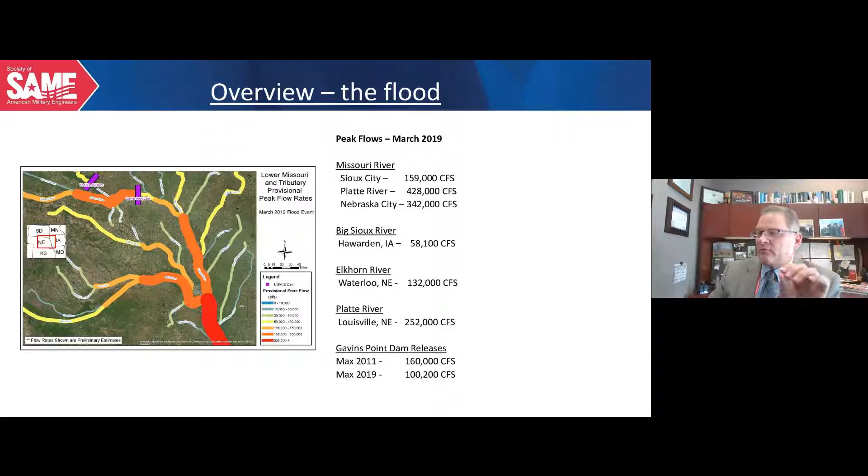The releases from the Gavins Point Dam up in South Dakota, which is the furthest south dam of the 6 main stem dams on the Missouri River, they peaked at 100,000 CFS. In 2011, they ran 160,000 CFS for months on end, but they're two very significantly different flooding events. The 2019 event was driven by unregulated flows in the tribs south of the reservoir system in Montana, North Dakota, and South Dakota. 2011 was largely an upper basin precipitation event where we maxed out the capacity of the reservoir system, a little over 63 million acre feet of runoff during that year, highest runoff year on record. 2019 was just behind that at 62.8. So basically the same amount of flow, but a significant amount of flow downstream.

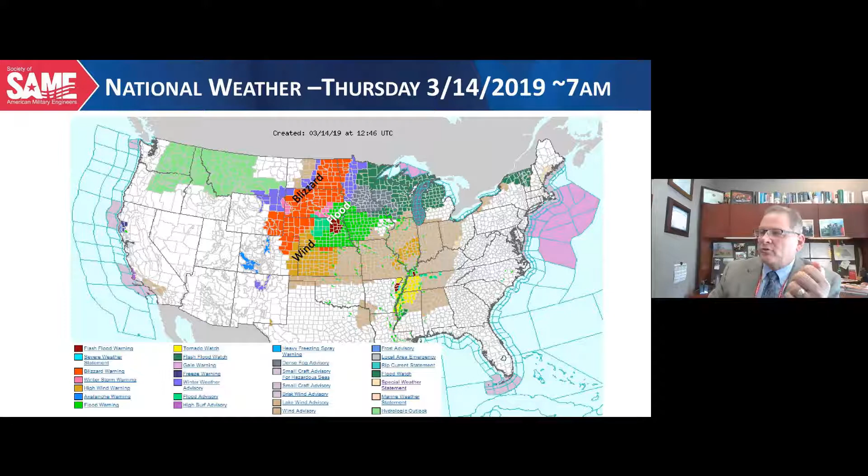This is going to kind of set up the precipitation event, and you never let a good event go by without coining a new word that you're able to apply to it. But this, we ended up with rain on top of frozen ground, on top of snow, the further north you got in our area of responsibility. And it ended up being what was affectionately termed a bombogenesis by those people within the weather forecasting purview. So you can see, I guess some would call this a beautiful picture. I call it kind of ominous and frankly a little bit scary.

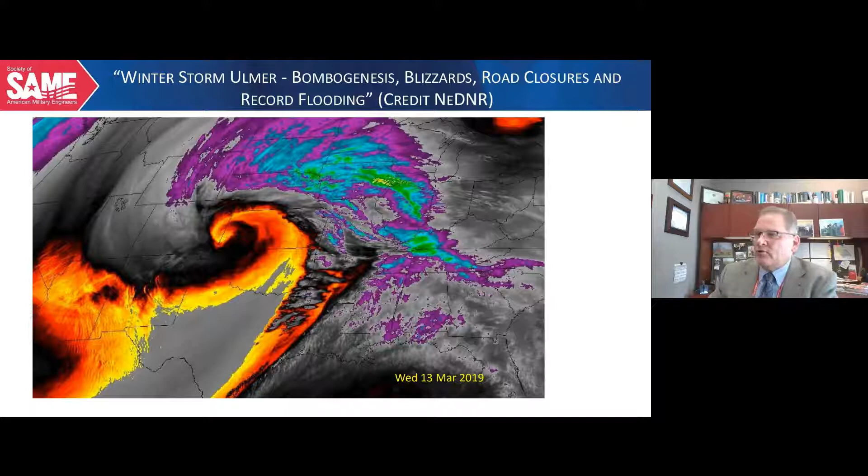But this weather track came up across the western part of Nebraska, saturating the frozen ground with upwards of 3 to 4 inches of rainfall. And then across the state of South Dakota, we ended up with significant bands of heavy, wet snow, all starting on the 13th of March. I can remember on the 12th of March, Tuesday, the forecasts were, well, we could see a moderate increase in stage on the river systems. And that dramatically changed over the course of about 30 hours, where we transitioned from it shouldn't be too bad to what became a very cataclysmic and catastrophic event that heavily impacted to the tune of nearly $1 billion worth of damage within a multi-state area.

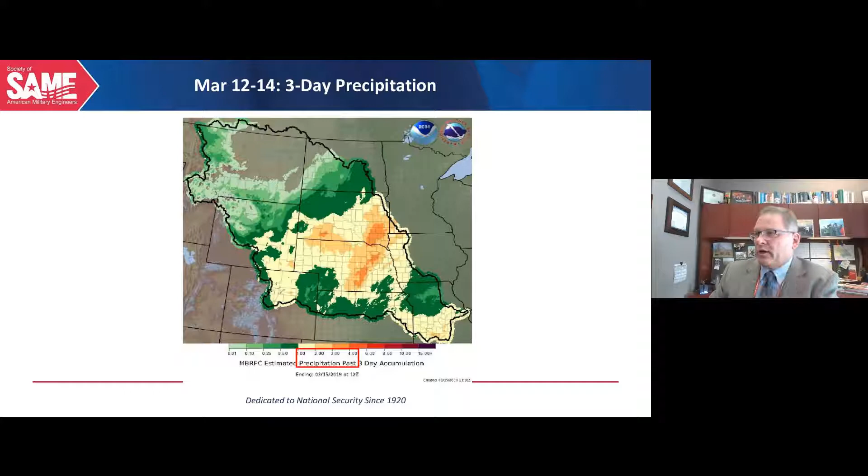So at Fort Randall, we minimized the amount of flow to zero, and then the rest of the flow was driven by the tributaries that came into the Missouri River system. So Ted? Yes, go ahead. You have the ability to shut off the Missouri River. Yes, we do. That's through those main stem dams. It's something that is very atypical. We've probably only done that during my career maybe twice.

It's not something that's obviously routinely considered, but this was the classic event where downstream flows, our inability to control the flow in the Platte, on the Little Sioux, Big Sioux, the Niobrara, forced drastic action, and we had the flexibility to be able to terminate that flow at Fort Randall. And basically over the course of the next 12 to 18 hours, you saw that tailrace from Fort Randall begin to decline as that flow cessation from Fort Randall began to take effect.

Unfortunately, Niobrara flows into Lewis and Clark, which is above Gavins Point, which again forced Gavins Point to have to continue to increase flows up to that 100,000 CFS flow rate. Today's flow rate coming out of Gavins Point is around 13,000 CFS. A normal spring flow. We have transitioned to drought conditions. The irony of that should be appealing to many.

But so we're in a situation now where we are reducing flows in order to protect downstream interests in water intakes and navigation responsibilities and those type of things. But we're currently running 13,000 CFS. So you transition from a system that's running 100,000 CFS to today's flow rate of 13,000. You can see why this was such a dramatic event during March of 2019. Understood. That's a factor of 8. Exactly.

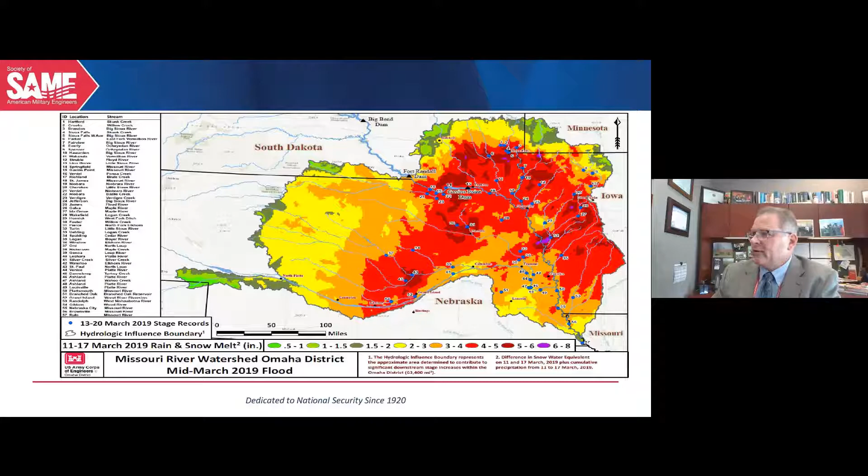And I really have to give accolades to local and state EM, to the Corps of Engineers. Certainly we were out there, boots on ground through the entirety, and many of the communities also rolled up their sleeves and they sandbagged and they provided a lot of those activities. When you see water coming, it's really an all hands on deck type of a situation.

So now, once again, we're going to walk through and you're going to see a whole bunch of water. And really the takeaway is holy smokes. But then I want to get to what the Corps of Engineers, what Omaha District looked to do to try to do things differently. Breck touched on it at the beginning of the conversation.

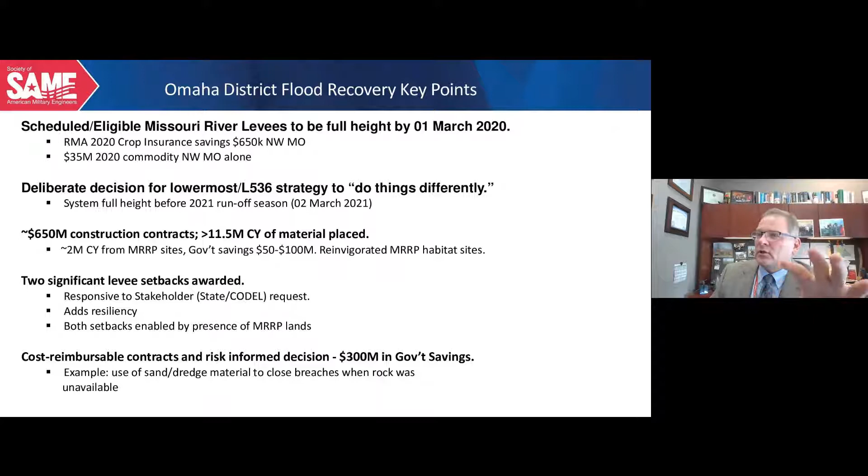Typically, within the federal government, you don't say use of cost reimbursable as a cost savings measure. Usually, it's been my experience over my career that when you get into an emergency and you're using a cost reimbursable vehicle, cost is secondary to addressing the significant risk at hand. In this case, however, we were successful in using that tool rather than the traditional firm fixed price contracting approach in order to save the federal government money.

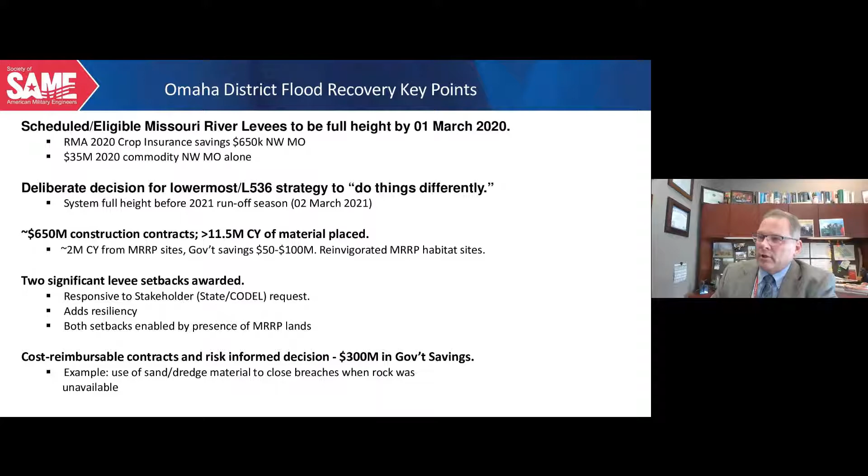And then a lot of times when you have breaches to be plugged, you preface the breach with rock before you place material over top of it, cohesive and non-cohesive materials. Rock was a big problem. As you can well imagine, while we got hammered with our levee system, a lot of other industry, Department of Transportation with roads, we had heavily impacted interstate systems, railroads. BNSF was heavily impacted and largely bought up a lot of the local rock, which was impactful for our ability to go in and plug those 50 breaches.

In 2011, it was high flows for long periods of time, and you ended up with seepage through the levee that ended up piping material, leading to the failure event. For 2019, it was largely predicated by flows over top of the levee, leading to erosive forces on the downhill toe side, which led to failure.

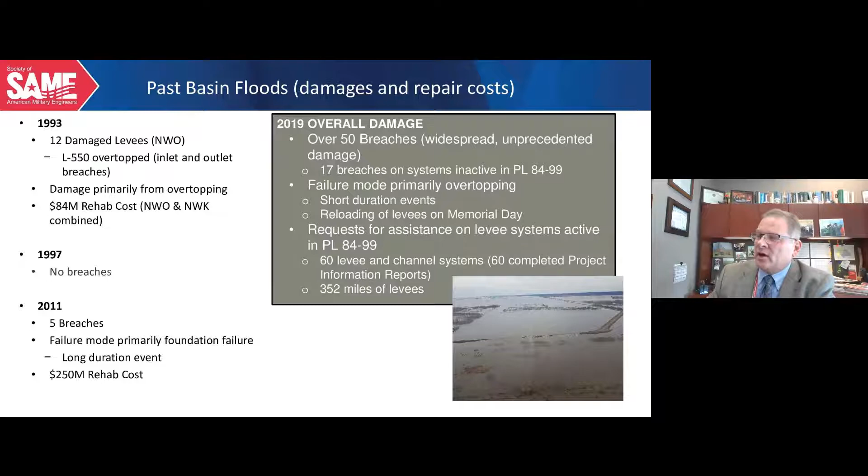Now a bunch of pictures and a bunch of gee whiz factoids. Again, you can see that this is the furthest north levee system adjacent to Omaha. It's just south of Council Bluffs, L611, 614. This is where the Platte River comes into the Missouri River. And if you look at a map, you can see it's kind of a right turn for the Platte. It says get to the Missouri, hang a right, go on down to the Gulf.

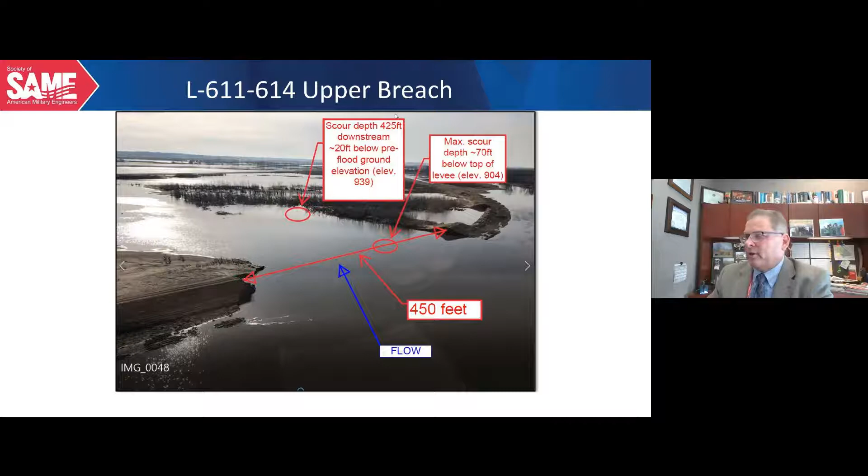Well, it was carrying around 250,000 CFS at the time of the peak point of the flood. We don't know for sure because all of the gauging stations were ripped out by the high flows, but it came powering through the Missouri and basically ripped through L611 levee system, left a lot of scour, deposited an incredible amount of material before it started making its way on the dry side, the landward side of the levee system, and proceeded to wreak havoc as it continued to go downstream, overtopping and breaching all the levees as it moved south.

Here's the initial breach. You see this kind of an eyebrow in the furthest left picture. The reason the Corps of Engineers does that is because you could go straight through, but the scour hole that is left is significant in nature, and it's easier, cheaper, and faster to make this eyebrow and put that in place in lieu of trying to pass through the significant scour hole caused by the event. Within 3 weeks of the flood event, we had already had contract awarded and contractors out there working. You can see them working on finalization and setting that breach repair in place within the other 2 pictures.

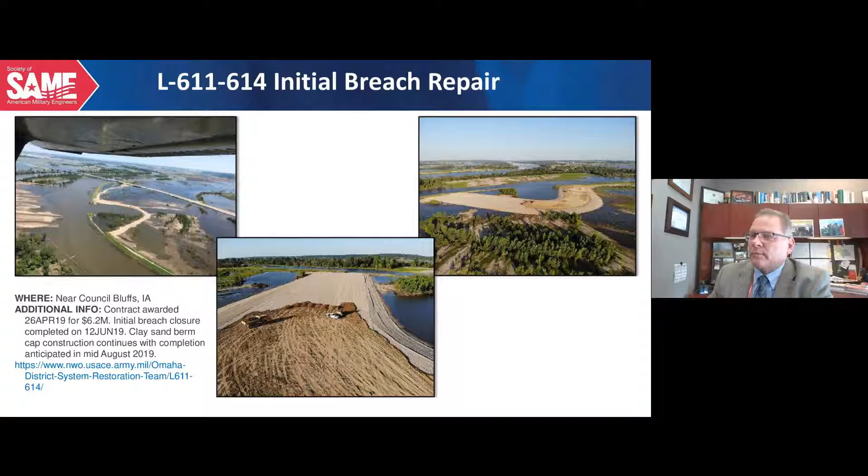Ted, you have a bunch of go-to contractors in this case then. Absolutely. We have what we call a rapid disaster infrastructure suite of contracts in conjunction with our rapid response contract vehicles. Seasoned, trained contractors, they acted in the prime capacity. What I find very interesting and gratifying is for this flood event, obviously a lot of significantly impacted ag community. A lot of the primes leveraged local capabilities, a lot of these local ag communities, and used their farming equipment to move the material necessary in order to effect repair.

Understood. So that was a great news story, really a win. If you can call any part of this devastation a win, it was working with the local communities and having those opportunities for them to be able to at least recoup a little bit of the damages wrought.

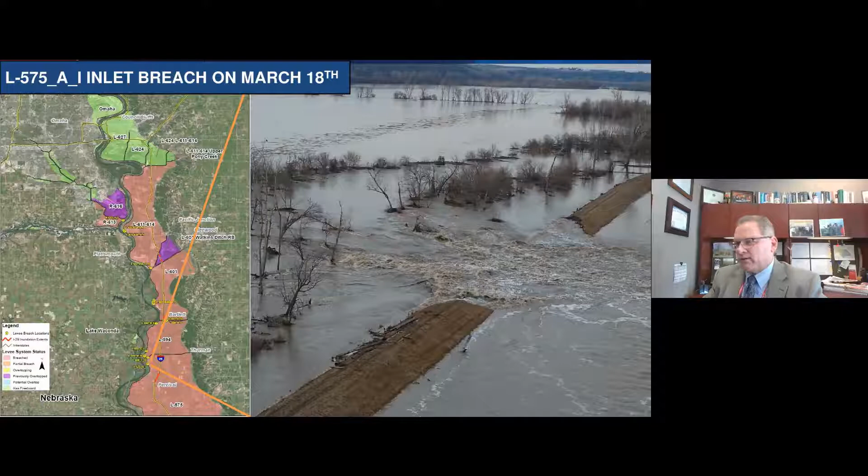You get a little bit further south, you transition from L611, 614, 602, you get down to L575, multiple breaches. In the left picture, you can see the 4 dots just to the left of Thurman. There's a tieback between levee systems at Thurman, and that's where you transition into L575. These tiebacks basically go on a tributary going up to the bluff. Both of the tiebacks were impacted and breached. So this shows a picture of some of that breach.

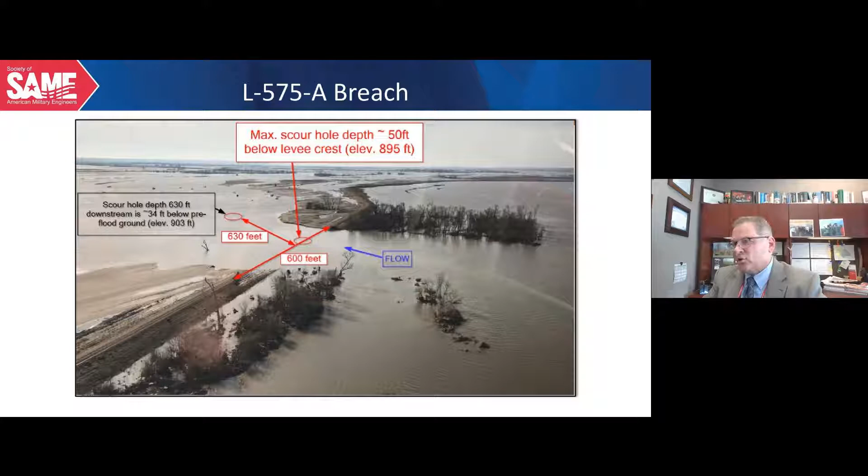You get a little bit further south into L575A breach, and again, they all got named. They were all worked on the basis of their priorities as we work north to south to try to effect repair as the system drained out. You can see in this case the scour hole was 34 feet below ground. Flow obviously coming from the Missouri into the breach, and then over the passage of time as the Missouri crested and went down, you saw the transition of flow from the dryland side out to the river.

This shows the initial repairs. The contractors are out there while flow is ongoing. We weren't in a position to wait for all of the high water to go down. We got out there and we're pushing sand and working in these communities. And it was interesting watching the final closure, because obviously you start squeezing flow, your velocities increase, and they're carrying the sand almost as fast as we were pushing the sand in. And then these sand berms are ultimately capped with cohesive material, which provided another opportunity for us to think innovatively about how do you place cohesive in the middle of winter. And we had some new innovative ideas that we provided as well.

The B breach has its own interesting story. During the peak of the flow, this B breach flow was the 3rd largest river in the state of Iowa. And when you got the Mississippi on the left bank and the Missouri on the right bank, you can imagine it was carrying a monumental amount of flow as it transitioned from the Missouri inland, and then from inland back out to the Missouri. So very difficult breach to seal. Took a significant period of time. We talked about those subsequent flood events that happened.

Excuse me. This was heavily impacted by subsequent flood events. Contractors out there trying to seal the breach while the river's coming up as a result of significant rainfall events that occurred in the May timeframe.

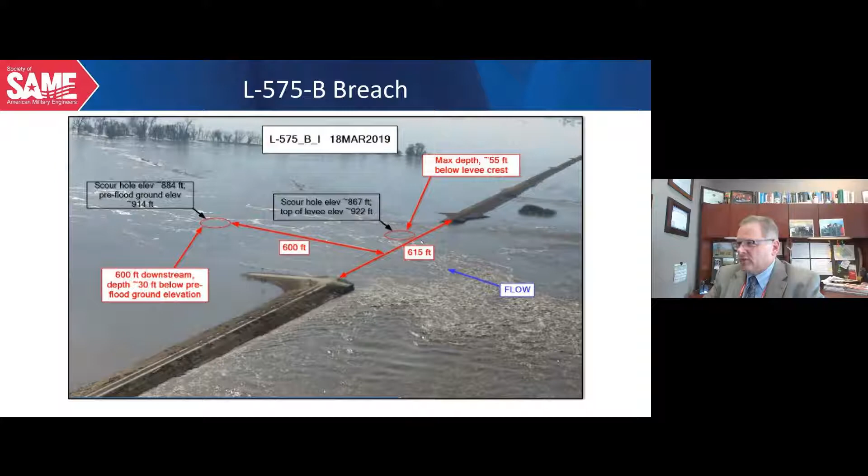This B breach, we originally awarded the initial closure in April '19. So again, we're getting a little bit further south. This is a month after the event, and the contractor's working hard to begin the process. As you can imagine, you've got water everywhere. The entire floodplain for the Missouri River is the better part of 10 miles wide. So you basically got 10 miles of soggy.

So we ended up leveraging dredge systems to be able to place material within the breach area from the riverside, because it was very difficult to access from the supposed dry side or land side. So in many points this wasn't a question of being able to truck in material in order to fill the breach. Some of these breaches we used dredge material, which was a very successful approach to getting that initial plug in place.

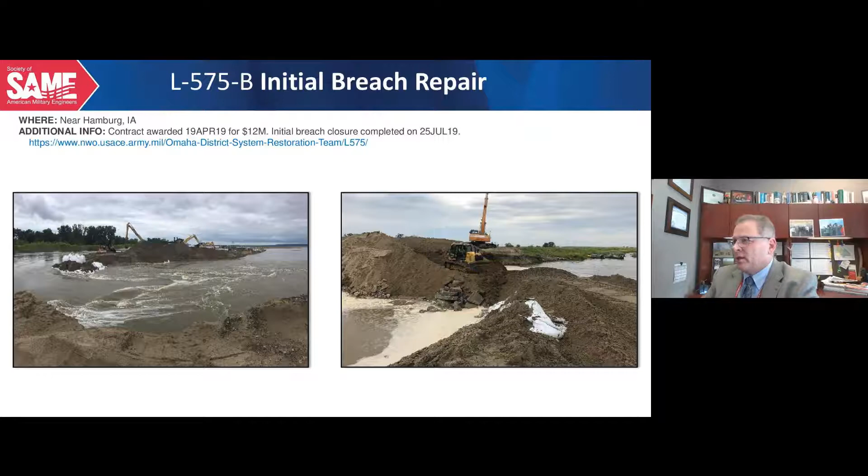Here's that final picture of the B breach, and you can see the, yes, go ahead. Basically, you took the sand that the river had spread about and put it back. Exactly. And then followed all of that up with a cohesive clay surfacing in order to prevent that sand material from eroding over the passage of time.

This B breach is kind of important to look at on the right picture. So the final flood event, the second rainfall event in September, which was incredibly wet, river's coming up. You can see it's out of its banks already, and it began to chew away at this completed breach area.

So we put these chevrons and groins in place in order to reduce the energy of the flow, allow for deposition of material within those fingers in order to protect that investment of sand and time that we had put in place that would subsequently be capped during the winter of, in this case, 2020 into 2021.

We're almost all the way to the south end of the system. L550 was the second to last system that we worked, heavily damaged. We had 5 or 6 breaches just within the L550 system alone. Worked closely with the state of Iowa, state of Missouri. We're transitioning into the state of Missouri down in 550. And 536 was exclusively state of Missouri.

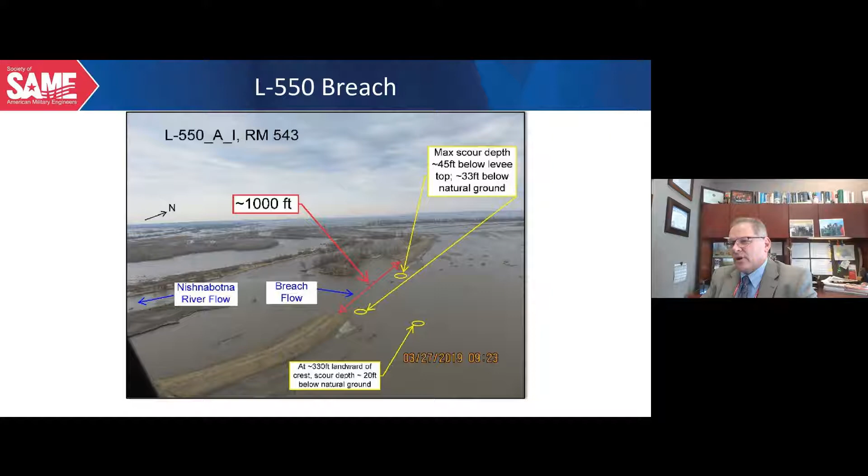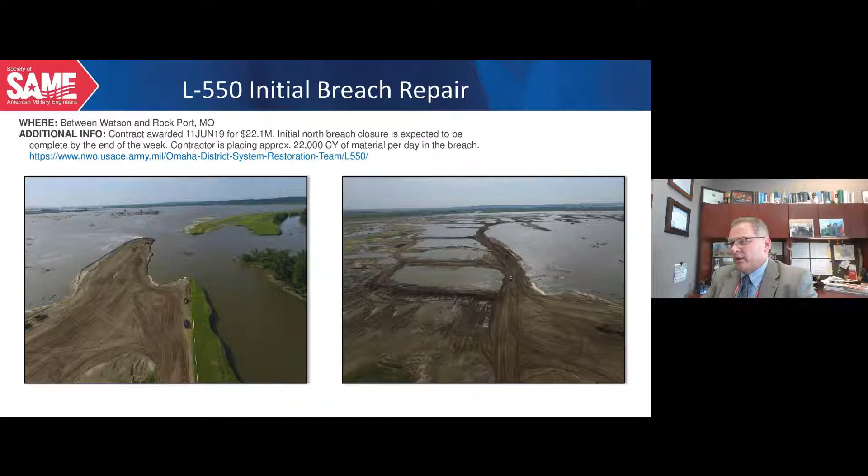You can see, again, the magnitude of these breaches. Oftentimes very difficult to figure out what's the riverside as you look at some of these photographs. Here, 550, you can see the breach repairs on the right. And again, to travel along the crest of the levee was an adventure in and of itself. Very challenging, very difficult. You basically had to have your breach plugged in order to provide access to further south systems.

This is L536. No, it is 550 still. I'm sorry. Next slide's 536. But it shows the final area. You can see that a lot of the summer's transitioned. We're already into fall and winter. You can see snow on the ground.

And once again, very proud of the fact that in 2011, we figured out that you could work in the winter in Nebraska and Iowa. We applied those lessons during 2019. It's hard to do. It's difficult to do. We had a period of cold snap in February of '21 where we were running 10 to 15 below.

And obviously, when you're trying to manage the moisture content within the clay material that's going to go on and it's all starting to freeze up, we tried to get after that through some innovative approaches. We put up sprung structures, heated inside of those sprung structures, and managed dirt within them in order to make it workable for subsequent placement.

So expensive, but when you start looking at time value of money and being able to effect repair quickly, vice having this stretch out over long periods of time, it became cost effective for us to continue these operations.

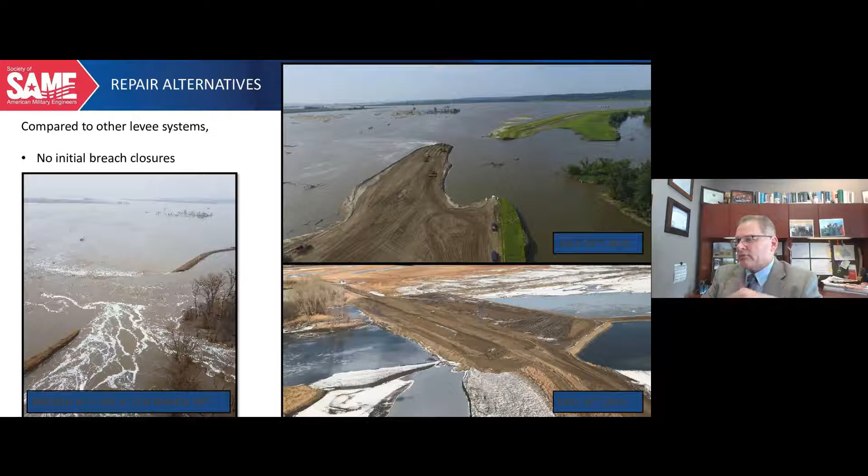Here's 536, and really it has been a poster child for a lot of success. We, in essence, moved the levee system back and allowed for the better part of 1,000 acres of what had previously been protected cropland to now be on the wet side of the levee. And as you can well imagine, if you're the landowner who's being approached by the community or by the levee sponsor to say, hey, we got a great idea.

We're talking about moving the levee back to give the river a little bit more room to grow because it failed in 93, it failed in 2011, it failed in 2019. We'd really like to try to do things differently. What do you think about us moving the levee and then you're going to have cropland that's not protected? That's not a very palatable conversation for those landowners.

So there became a long conversation with those landowners to figure out what can we do, what can NRCS do with some of their permanent wetland easement programs, what can the local communities do, what can the state do to supplement, to ensure that those ag interests are not long-term negatively impacted.

Because it's been my experience that when you're on the wet side, if you're fortunate, you get a crop 3 years out of 10, because some of these areas will still be cropped. And basically the ag community is hoping that it's a moderate moisture year that allows them to gain harvest, versus on the dry side, where they can count on production 10 years out of 10.

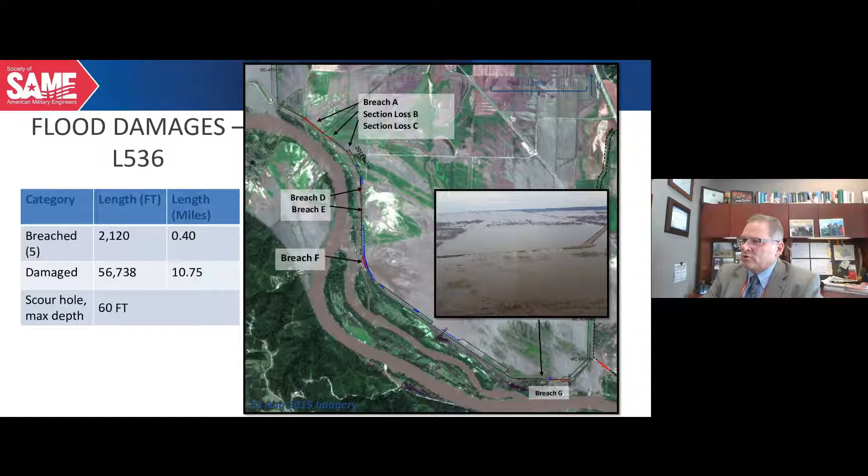And the next picture, I think, shows an overview of this offset or this setback. On the right picture, you can see the original levee configuration adjacent to the river, tightly constricting the river, to the setback, which provided the opportunity for the river to have access to the floodway, and gives it a little bit more of an opportunity to carry additional flow. All of this within the construct of the PL 84-99 program.

The way we were able to do this was to look at the cost of repair along the original alignment. That has to be contrasted with the cost of construction for this new setback, and the costs have to be equal. You can't spend more on the new system setback than you could on the original. That was an important lesson learned.

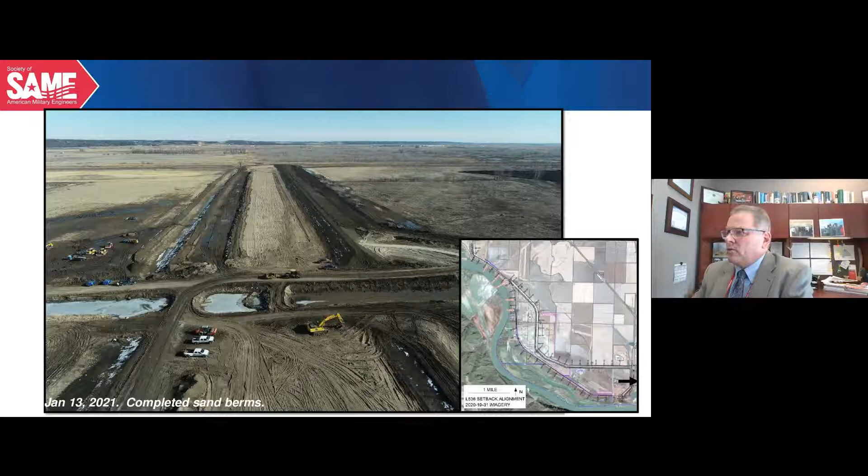We worked very closely with our higher headquarters in Washington and in Portland to ensure that we were in conformance with law and that we're meeting the authorized purpose of this levee system. And it became a huge success. Once again, working with Nature Conservancy, they did a lot of the heavy lifting, working with the ag community and the landowners, and ultimately we were successful in getting that setback.

Some more of the lessons learned. When the flood of 11 happened, it was all hands on deck. How are we going to get after fixing this? And within Omaha District, what I did is I took a cadre of staff and basically established a brand new branch within the project planning and management group that I called the Omaha System Restoration Team.

And it's a matrixed organization where I have staff from construction and engineering and contracting and counsel and everybody that is necessary in order to execute the mission, with a devoted responsibility, in that case for the better part of 18 months, to ensure that we provided the devoted attention necessary to accomplish a significant lift. In that case, it was $500 million.

So unfortunately, when 2019 came and the flood was ongoing, I knew exactly what needed to be done, which was System Restoration Team version 2. So we incorporated some of the lessons learned that we had gone through with the SRT. A lot of lessons learned with respect to real estate and management of real estate. Real estate is a levee sponsor responsibility, and can oftentimes be the long pole in the tent in terms of gaining access to the project site.

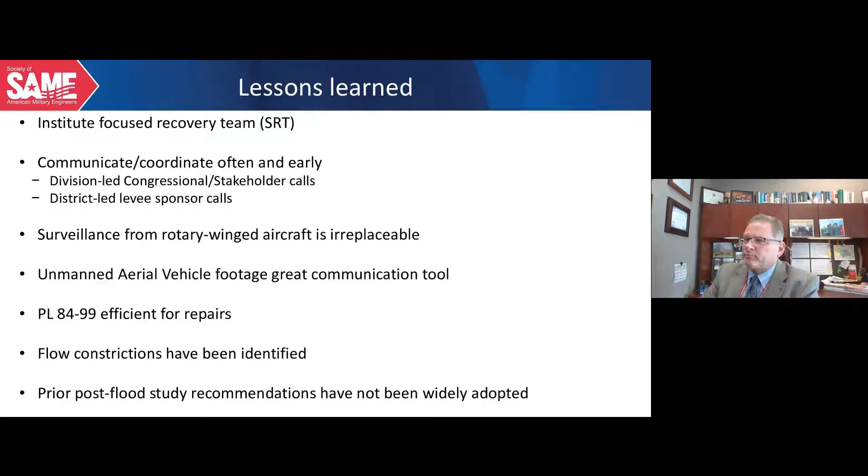Floods on the Missouri River have been a well-studied phenomenon, and we continue to go back to the lessons learned, even as far back as '93, and look at the tools that have been developed to see if there's opportunities for us to implement them as we move into the future. I talked a little bit about trying to get into the 21st century. You've got to remember a lot of these levee systems were constructed with the use of relief wells on the dry side in order to reduce pore pressure so that you didn't have issues with flow through the levee system.

I think it's been everybody's experience that over the passage of a half a century, relief wells typically are not maintained really well. Typically, they're going to foul. Typically, they're not there when you need them. We recognize that, and we have really embraced this construct of seepage berms, on the dry side and wet side, in order to provide a longer hydraulic path, which prevents that piping of material through the levee and prevents the failure. We applied this post 2011. We refined it and really applied it in 2019.

And I'm happy to say that of the 5 breaches that were fixed post flood of '11, none of those levee segments had any issues or challenges during the flood of 2019. So this is an opportunity where, again, we're trying to think differently. We're trying to be more resilient. And this was one of the lessons learned that I think becomes a national standard as we move forward.

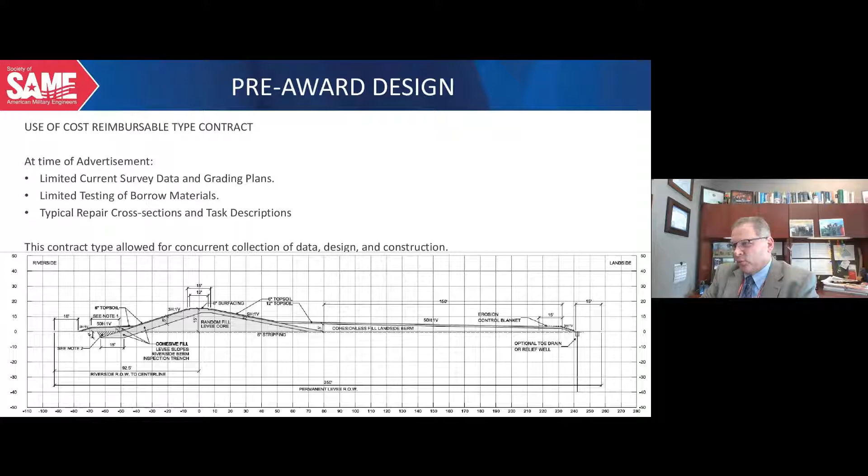This, again, kind of cycles back to what many have coined is really one of the more significant areas of resiliency or things that we did differently coming out of the flood of '19, the work that we did at L536. Couldn't get out there. It was just a heck of a mess. It was completely saturated. So we had a lot of drone footage. We worked with industry and basically did a lot of things virtually in order for them to begin to refine their costing approach. We talked about the use of the acquisition vehicle. I think that is a singular success for what we've been able to accomplish there.

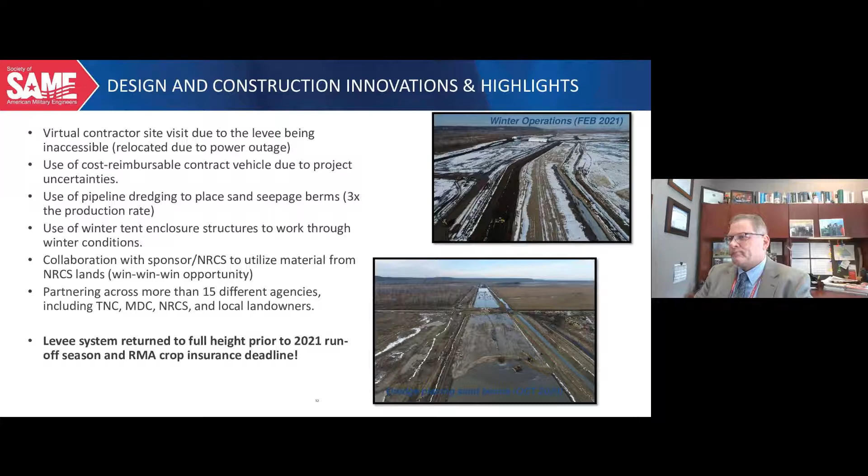So you've got the pragmatic hydraulic considerations of giving the river more room to roam, but you also have the environmental impacts and benefits associated with greater diversity. A significant part of the Missouri River Recovery Program talks about mitigative responsibility of the federal government caused by the Bank Stabilization and Navigation Program, which basically channelized the Missouri River from Sioux City south down to the mouth. Part of the federal government's responsibility is to be able to mitigate for the damages caused by that activity.

So this L536, you talk about 1,000 acres of reconnected floodplain. You talk about seeing greater diversity, fish, amphibians, birds. It's real. We've seen it in just a very short time since we were successful in doing the setback.

And from there, again, a lot of information. I am very excited about the success that we've been able to leverage working with a host of different people, a host of communities, in being really in a position to invest the nation's dollars. And I'm very serious about the investment of basically $750 million to effect repair on this levee system.